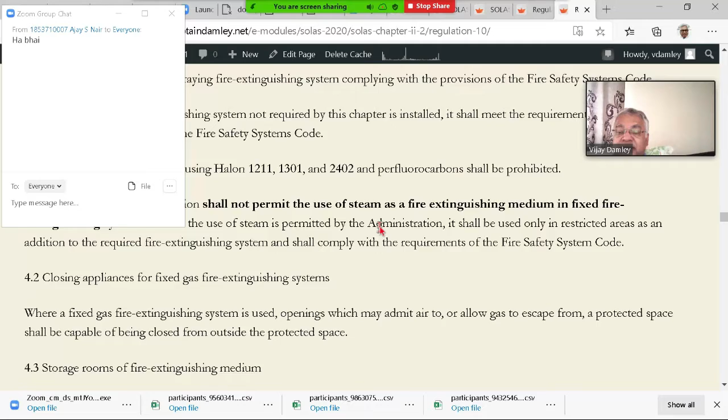Okay, some of the major rules you understand always. Storage room for fire extinguishing medium, as well as the firefighting system, the extinguishing system, cannot be inside the place it protects. It has to be somewhere else. That means, for example, CO2 room cannot be part of machinery space. CO2 room cannot be part of any store or say

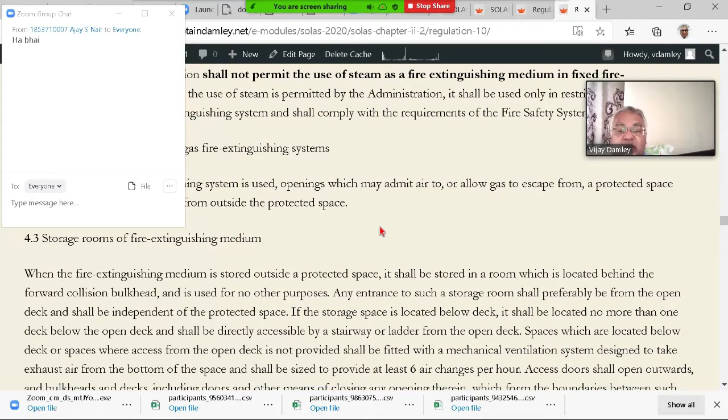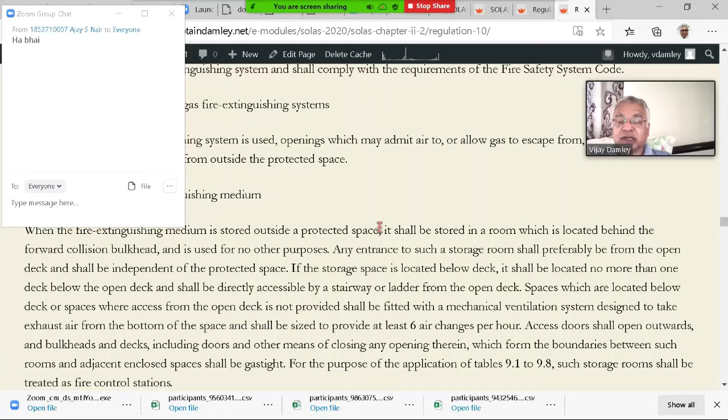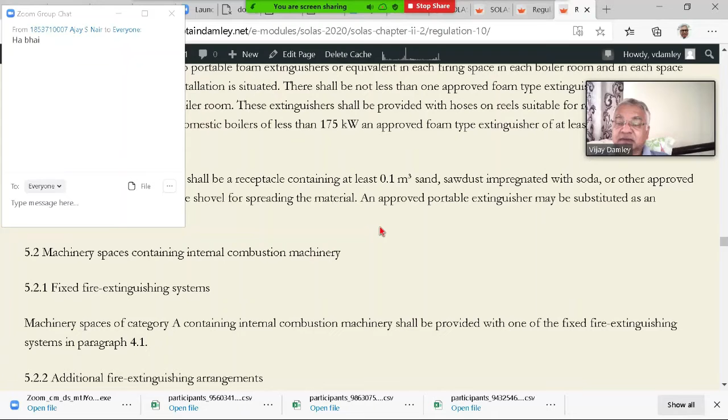holds, cargo areas, cargo holds. So this is one important thing. Always remember, all these things must be outside. All the controls are also outside, not in the same space. That means each space is isolated and the controller is outside. One minute, we were here.

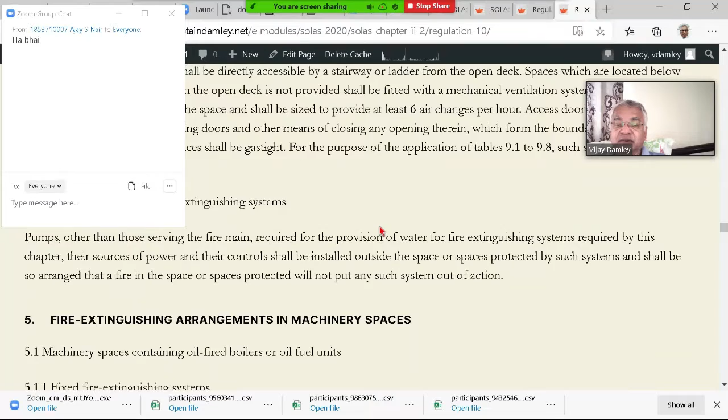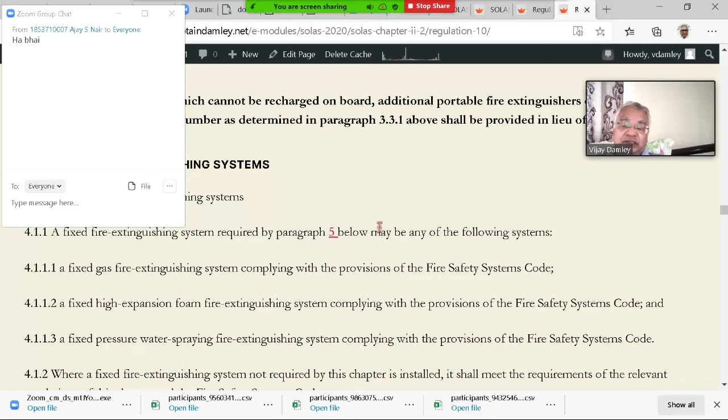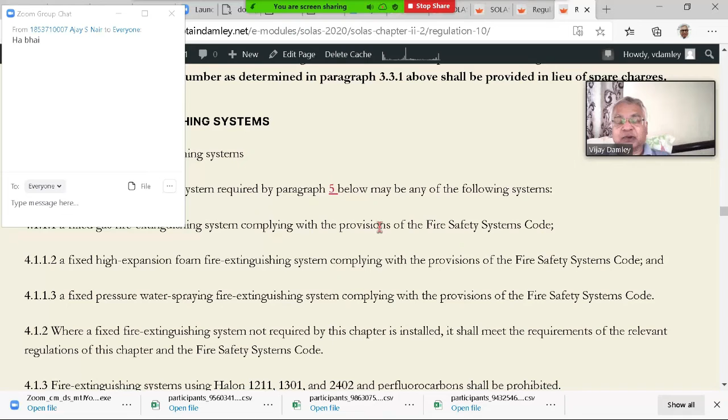Okay, we have got gas type of fire extinguishing system, high expansion foam, fixed water pressure. One means pressure water spraying system, that is water system. And then there are some specialist systems which generally you shall not see. Generally, because then you get into the halons and all, which were allowed once upon a time, and today, if at all any specific thing is required like this, though very very unlikely that you will need a very specific

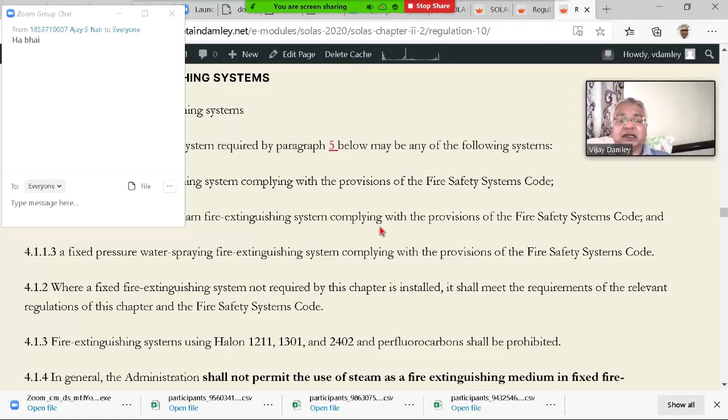gas, because those things will generally go in containers. Nowadays you don't have ships which carry really so much of a general cargo. Okay, steam is not permitted. Okay, and the use stopped long ago. Engine room will have generally foam extinguishers. Then boiler room will have a 45-liter type big one with wheels. Okay.

So in engine room, within 10 meters, every 10 meters you shall find a foam extinguisher in machinery space. I keep on saying engine room, technically it should be machinery space, but you will have it every 10 meters.

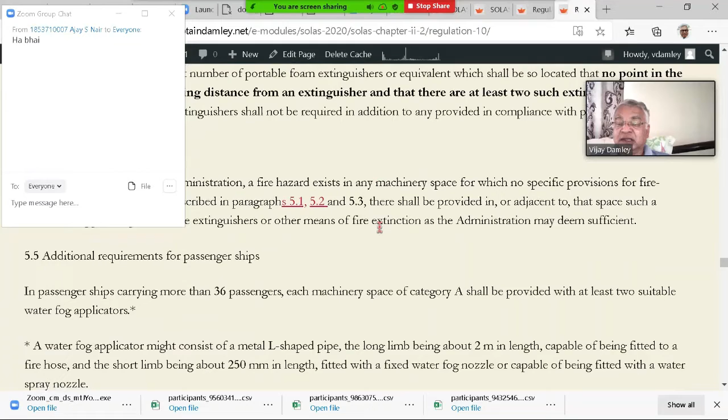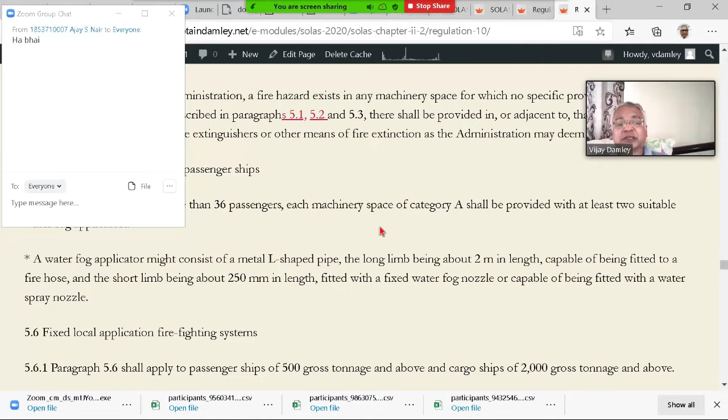Fog applicators, the one you have seen in the lab with the big pipe, those ones, those 2 meter length pipes and all, those ones are more on passenger ships. Then you will have them on ro-ro ships or the special places, that is special spaces means automatically it comes a passenger ship.

Then machinery spaces, today's ships, you will always have two systems. One is a carbon dioxide system and other one will be generally hypermist, and none of them you put it on automatic. The reason is you keep on getting false alarms, and you do not want anybody to get hurt because there was a false alarm and the system got activated. These things happen. I mean, this is not something new. These things do happen.

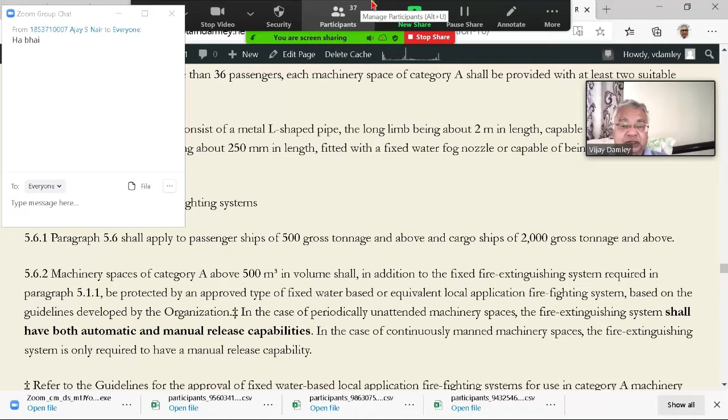One second, somebody is at the door. Let me just have a look. One second.

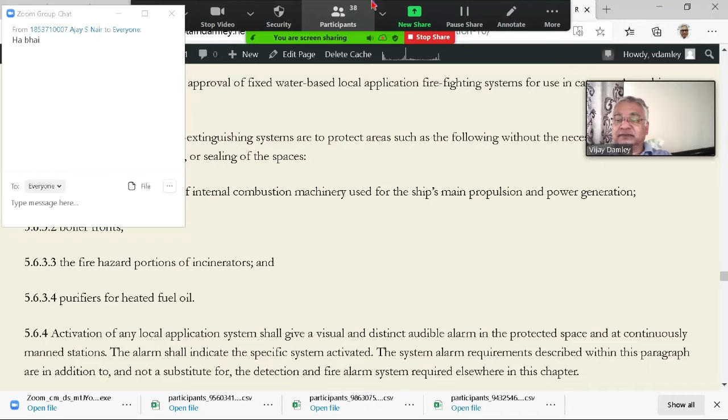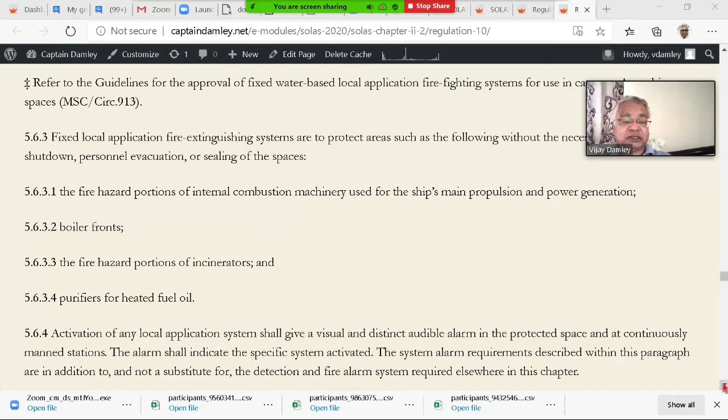Now, like I told you, hypermist systems, and what happens is hypermist system has come in because it is very safe to use it. It is like a fog drifting down, very romantic type. Only thing nobody sings that time, but it is like fog drifting down and absorbing all the heat in engine room. Machinery spaces you will always find hypermist system today.

Passenger ships sprinklers, because they detect fire, they contain it and try to extinguish it, and they also give alarm, because moment detection is there, the first thing that starts actually in the key sequence is if fire is detected because of the heat, because sprinkler systems work on heat, the first thing that will happen is that quartz bulb will break.

That means the sprinkler has started, water spraying has started, and because there is a drop in the line pressure, the alarm starts. So remember this is how the sprinkler alarm starts. First it starts extinguishing and then gives alarm, technically speaking.

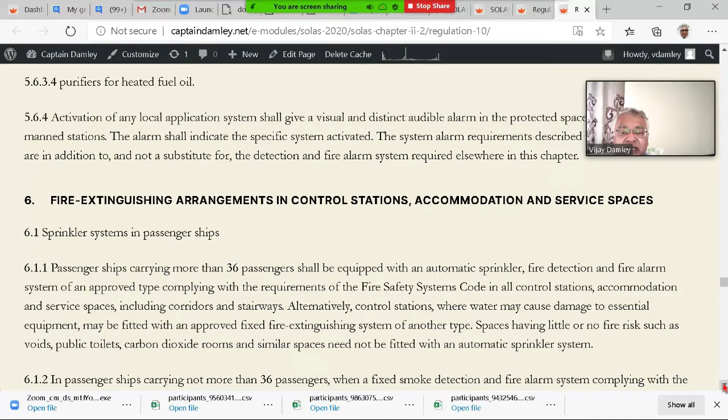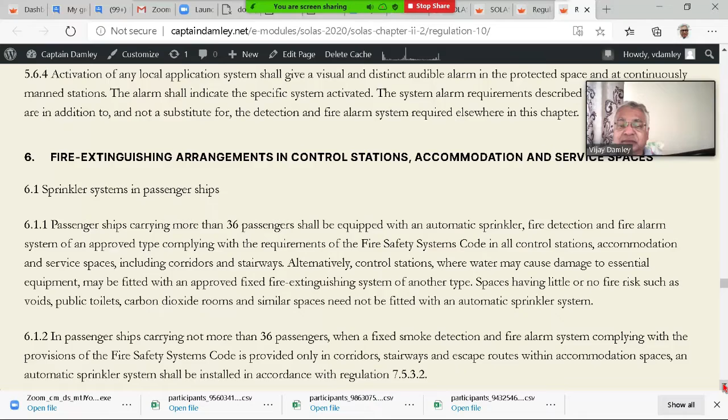So those ones work on heat, and those quartz bulbs, they are not like other detectors where detector picks up, sends the electronic signal, and then the alarm starts. No, here it bursts and the alarm is fixed on pressure system. So moment the line pressure drops, it starts the pump and it also starts the alarm. Got it? I think you must be clear now.

Cargo ships, normally you don't have it, except manual ones. Generally you will find in a paint locker, I will say, and if at all anywhere you have got small compartments where it is possible, but that is generally manual. You start the fire pump, open the valve, and the sprinkler starts, and you make sure that everything is closed.

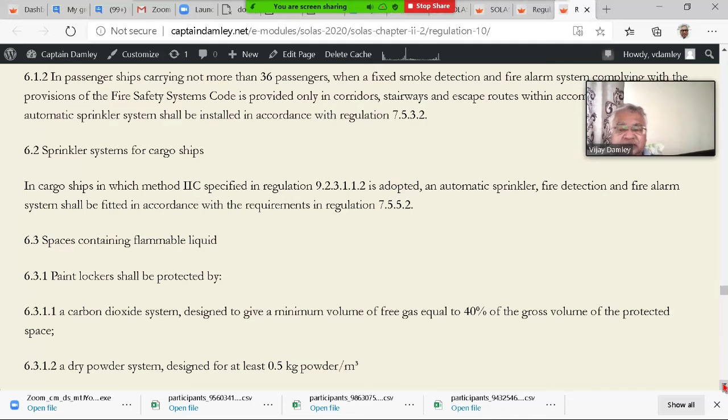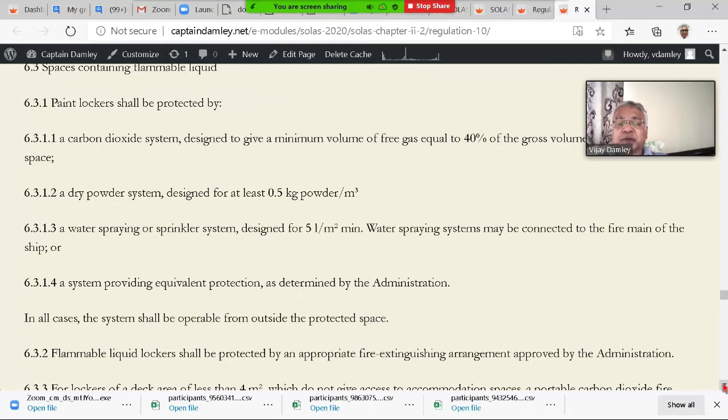Or for the purpose of paint rooms, you also can have carbon dioxide system, that is again manual, but you have a cylinder outside the compartment where you just open the valve and release the CO2 inside. Dry powder systems may be there, though I have not seen one. The sprinkler system 5 liters per square meter per minute, and also then there is something more than that.

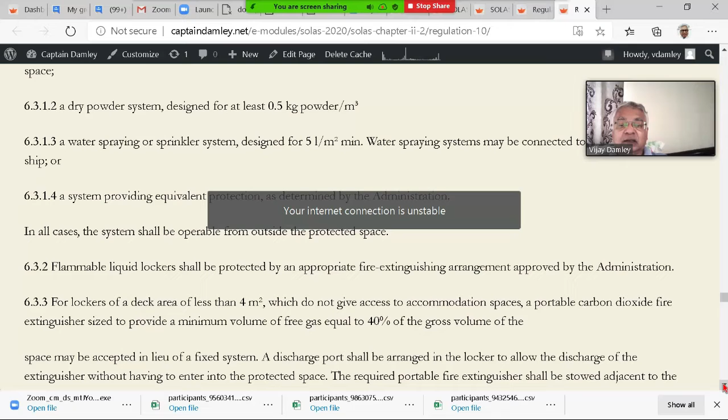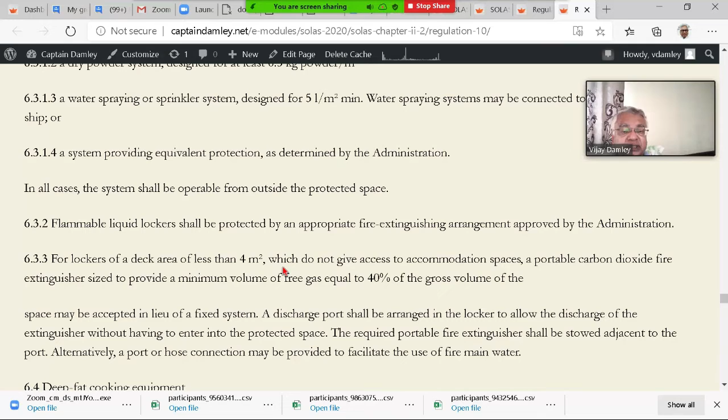Now this is like small lockers, small lock, 4 square meters, means just about 40 square feet. So there you can have another type, instead of any one of the fixed system, you can have a portable carbon dioxide fire extinguisher.

Deep fat cooking, there is a system on top which just fills it up with foam, because hot oil from the kadai, when you're deep frying, can spread quickly and start a fire. So there is a special system for that. In all the galleys you will find a special system, deep fat cooking equipment has got foam from top.

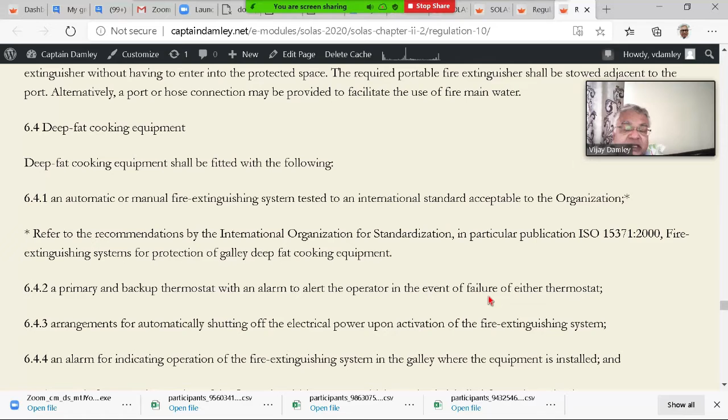There will be, of course, these are minor things actually, but in case you remember it's good, there is always a backup thermostat. Means there are two things, it is not based on one, because if there is a failure, even we say fail safe system and all, but the fail safe principle is we assume it is bad and we take the action. If you are going to have an automatic thing, if your thermostat goes out, it will assume it is fire and it will start working. So you have got a second thermostat also. If one fails, the second one is still telling you no, it's okay. Then it automatically turns off the electric power and so on.

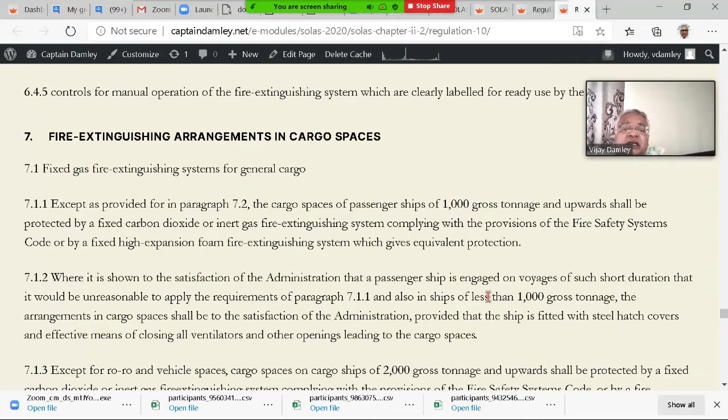Here we start one of the main things, fire extinguishing arrangements in cargo spaces. Now what happens, cargo spaces, you will have normally a CO2 system, a gas system, or inert gas, normally CO2 because that is still going around, and you will also be getting maybe nitrogen based systems or inert gas based systems. They all have got the same property, they don't have oxygen there, they replace the oxygen with the inert gas, so the fire has to die.

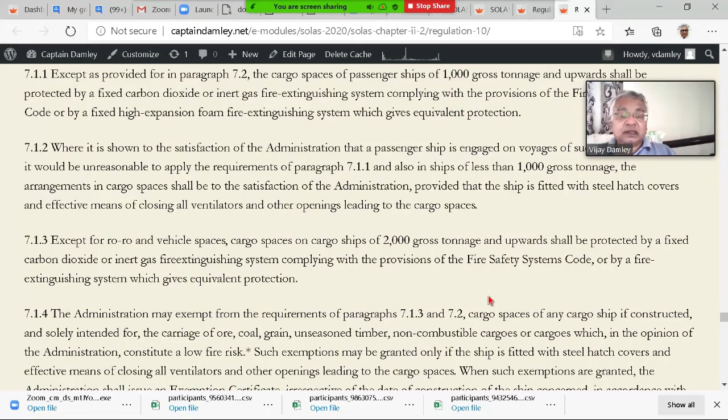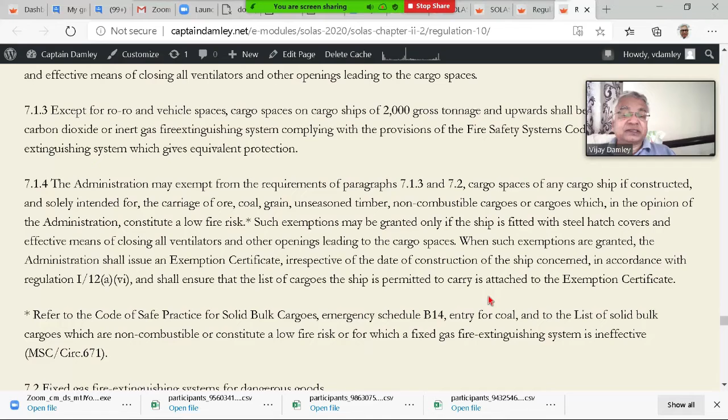Now it is like you take 40% of the capacity, the cubic volume of the largest compartment on the ship which is getting protected by the CO2 system, and you keep that much CO2 there, and when you release it, you release in banks, first dose so much, then the second dose. And if you are going to carry dangerous goods, you may need additional requirements based on what sort of capacity your ship has got, what type of dangerous goods, and what sort of storage arrangements, and so on.

Cargo tank protection is always the medium expansion foam. It is in open areas. Now remember one thing, the gas systems are used in enclosed spaces, foam is used in open spaces, except the high expansion foam. The idea of this medium expansion foam is, in case there is an explosion and the tank gets ruptured, there will be an open area of the inflammable liquid.

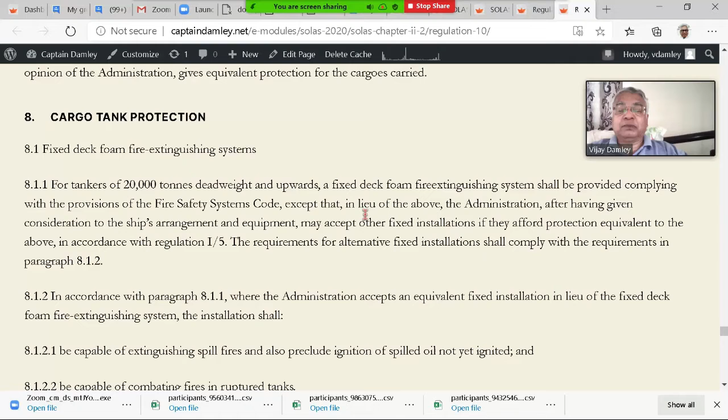Now what will be the area, assuming just the full cargo area, correct? The worst possible scenario is the full cargo area is exposed, so that much area must get covered by the foam, that much foam capacity is given, and that's why you've got applicators. Those fixed applicators are just like some sort of nozzles, and there is a direction you can use, but the idea is to fill up the whole deck with foam.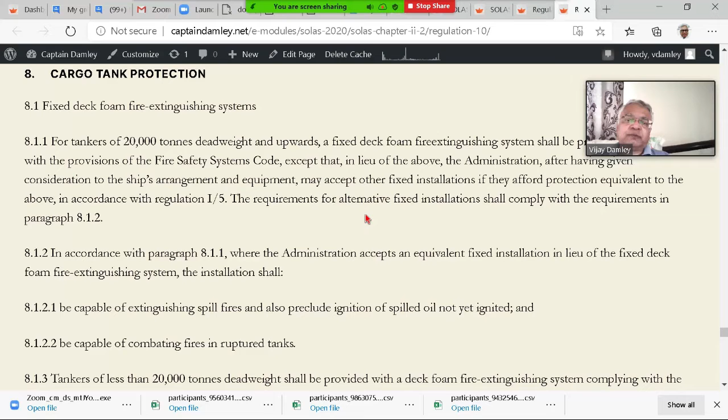And now of course the deck won't be there in case of this. Now putting foam on an empty deck has got no meaning, unless you expect an additional problem is coming, because you are not sure. So in that case you may coat it completely, so that if there is any leak, anything, it will be contained. If there is an explosion, you again fill up, so the foam will cover up all the loose surface on the oil.

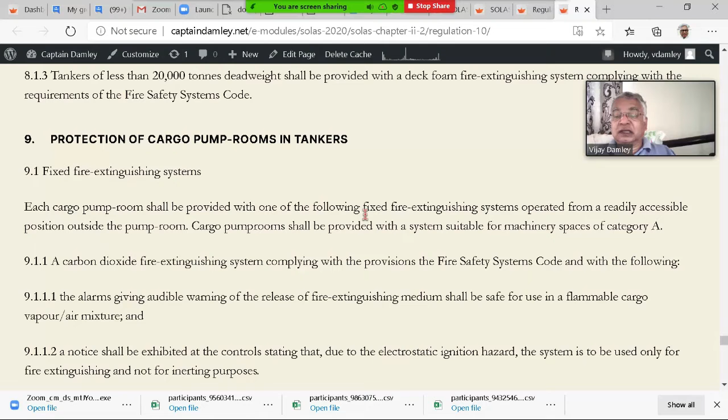Next one is cargo pump rooms. Now here there is a choice: one of the following fixed extinguishing systems operated from a readily accessible position outside the pump room. So again we are coming back to the same thing, that the controller has to be outside in a safe place. A carbon dioxide system with audible warning before you release it.

And this is the very tricky part of it. What happens is, if you have got an inflammable vapor air mixture inside, and if you release CO2, there is a possibility at the nozzle there will be static, and ice accretion, sort of ice crystals will be formed at the nozzle, and they will cause a spark because of static electricity. So it is always dangerous, this is what causes ignition, this is what you should be aware of.

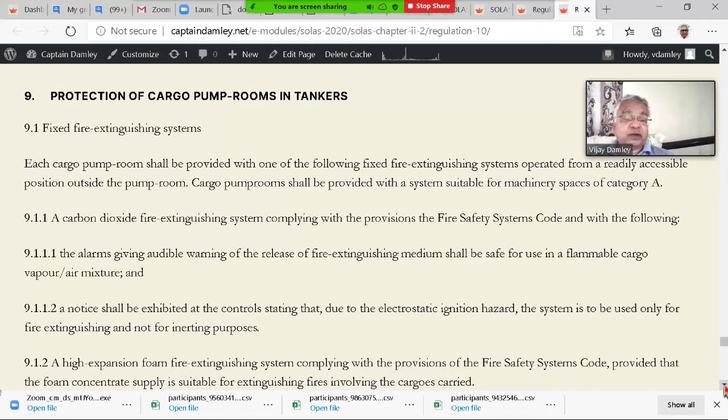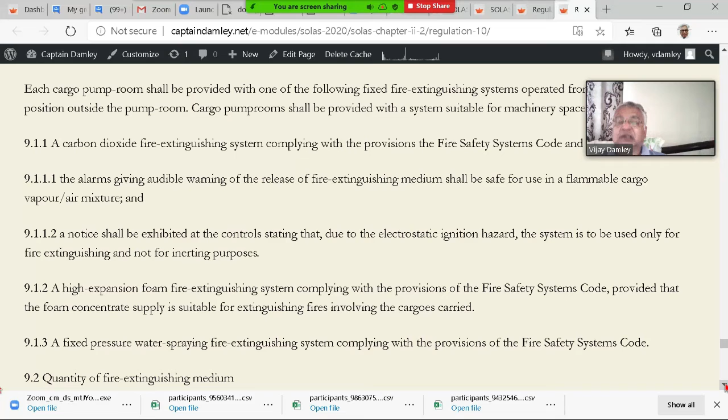You don't use it for inerting purpose, because what is inerting purpose? Suppose if I have got a possibility of fire in a cargo hold carrying some different cargoes, I am not talking liquid cargoes, I am talking some sort of solid cargoes. I can inert the atmosphere as a precaution by just releasing CO2 and saying now it should not catch fire, because it's an inert atmosphere. But that cannot be done on a tanker, that is the cargo pump. So this is a very important line: the system is for fire extinguishing and not for inerting purposes.

High expansion foam systems are possible for cargo pump rooms because these are quite deep - like a smaller building but tall, maybe 7-8 floors. The draft of ULCC class ships today is like 24 meters, plus at least another 15-16 meters to reach deck level - that's 40 meters depth. Cargo pump room should have at least 40 meters, and each floor is approximately 3 to 4 meters, so it's like a 10-story narrow building.

So it is deep, there is enough volume, so it can work if you have got a high expansion foam system.

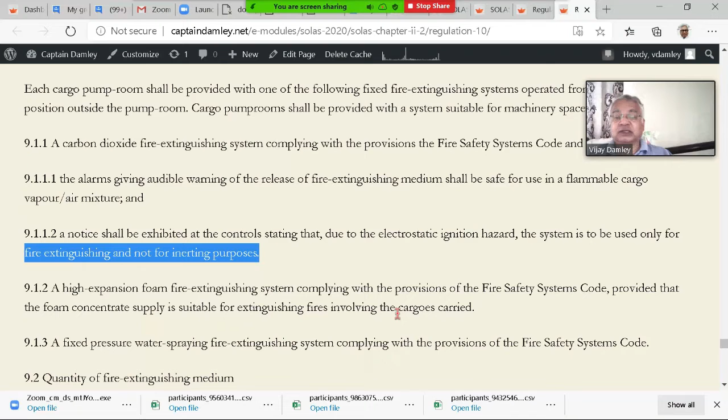Now, provide that foam concentrate supply and all - of course it is expected, if you put the system it has to be there. Or a fixed pressure water spraying system, that is like a hyper mist system. You just allow the whole temperature to be taken off, because one of the problems when we deal with pump room is one bulkhead is cargo tank, other bulkhead is engine room. Engine room normally will be a warm place, so it will always be a sweaty place anyway, one way or the other.

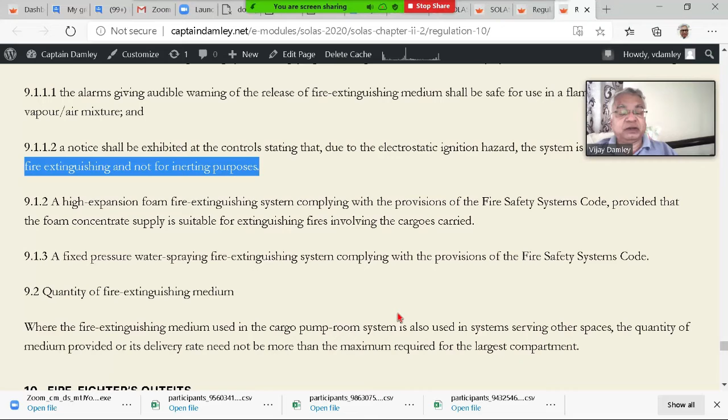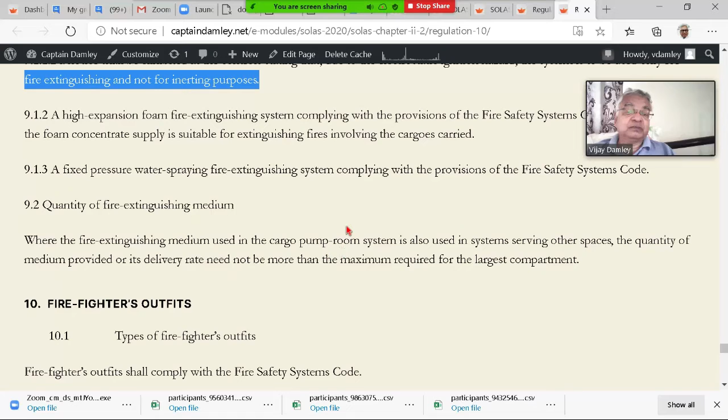And cargo, it depends, because cargoes are also heated - cargoes may be heated to 40 degrees Celsius. So there is enough heat, and the difference in heat is much lesser, so the high pressure system can work much better by removing the heat. And there will be sufficient quantity - the medium need not be more than the largest compartment. Now the largest compartment we are talking about is not the cargo pump room, it will be one of the cargo tanks.

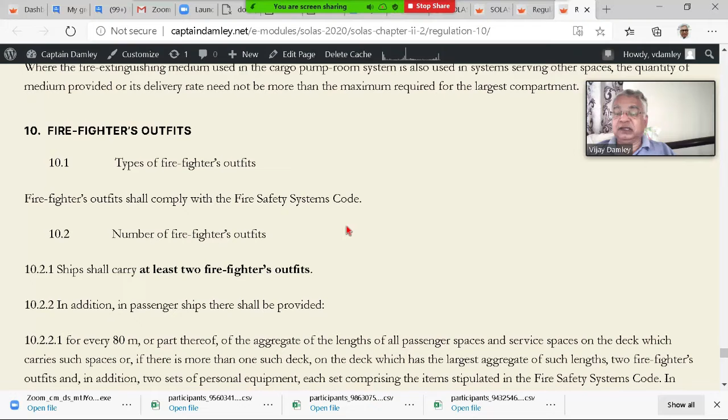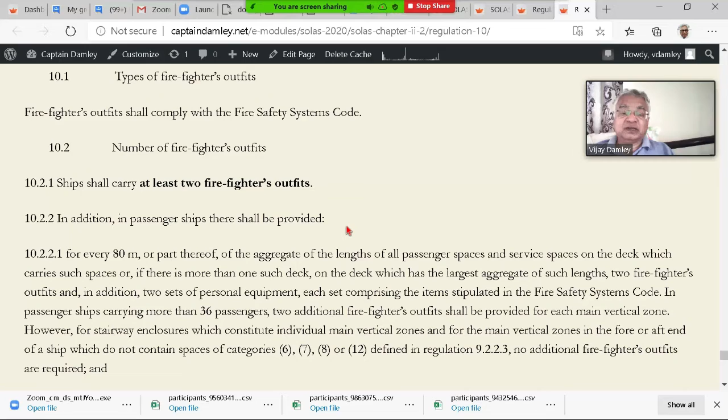Coming to - that was sort of a revision we have finished. Okay, now fireman's outfit. Standard thing: minimum 2 must be kept in a place which is accessible. For every 80 meters on passenger ships you need 2, so it can be more than 2 sets. Now what it contains normally: outfits, personal equipment, and then there is a full list somewhere here.

Breathing apparatus - when you have got the requirement, if you wear one cylinder on the body, you must have 2 spare cylinders, that is 2 spare for each. It is possible, like on passenger ships and all, you have got larger numbers, so they do give concession - if you can interchange the cylinders, then okay, reduce it a bit. But it sounds a little stupid, because you are looking at hundreds of millions of dollars, and then you are going to argue about $200 - it doesn't make sense to me. But anyway, regardless of how rich they are, ship owners can be beggars in front of authorities to gain something.

Now another thing is, if you have got an arrangement to recharge the cylinders - the compressed air breathing apparatus cylinders - if you have got a medical compressor, what is required for charging these bottles, and that is also working on emergency generator, meaning emergency power source, then you can get a concession of reducing the number of cylinders. But most shipping companies will not go for it, because the idea is you can do better drills if you can go freely and use the breathing apparatus.

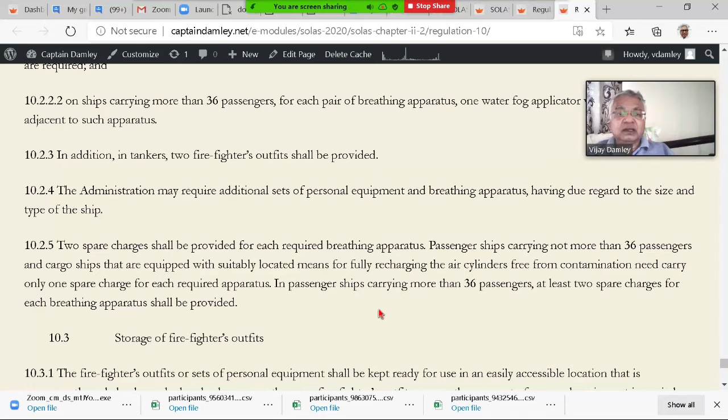If you are going to be scared thinking 'the air will run out, then what will I do', then you don't pay that much attention for these drills. And the most important thing on a ship is emergency drill. Storage must be an easily accessible location, clearly marked with a sticker and all - that all must be there.

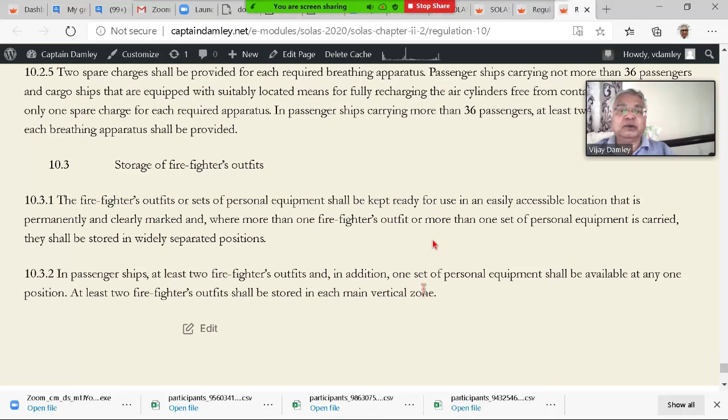Passenger ships, of course, I don't put so much because again this is the reference book and you can't be mugging up everything. So we move to rule regulation 11.

Nobody is on chat. Good. 38.

Structural integrity. Now see, simple rule, no? Maintain structural integrity of the ship, preventing partial or whole collapse of the ship structure due to strength deterioration by heat.

Meaning it should not happen that there is a fire and heat deteriorates the strength of the material, meaning it starts melting and all and it starts collapsing. Then there will not be separation. That means what we thought, that we made a ship with a number of boxes, each separate, and the fire shouldn't go from one compartment to other - that whole thing will fail.

The material used in the ship structure shall ensure that the structural integrity is not degraded due to fire. That is one of the things you will find if you search on YouTube - you will find ships after fire. You know, after fire, what you see? The steel structure with corrosion and all you will see, but it is very much there as it is - it doesn't collapse.

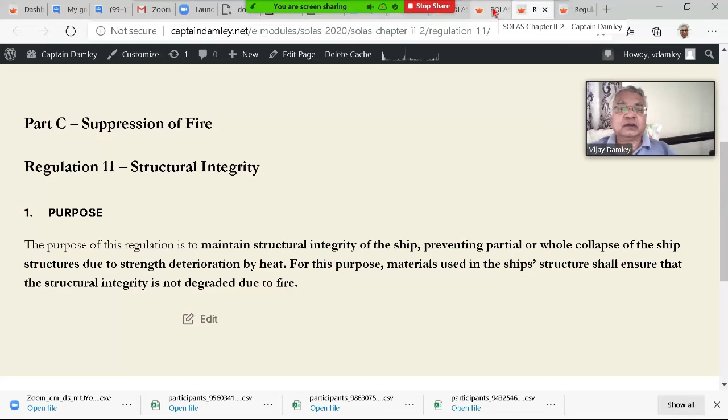Actually, some of you must be getting bored with it if you paid attention earlier.

Escape. We have seen that finally we all try everything, contain the fire, extinguish it, everything well said and done. But in case it goes out of control, you cannot be having a movie style where people have to die. No, we always think that you should escape. If you can't tackle it and it goes beyond your control, no problem, you escape. Now this escape is always to the embarkation deck.

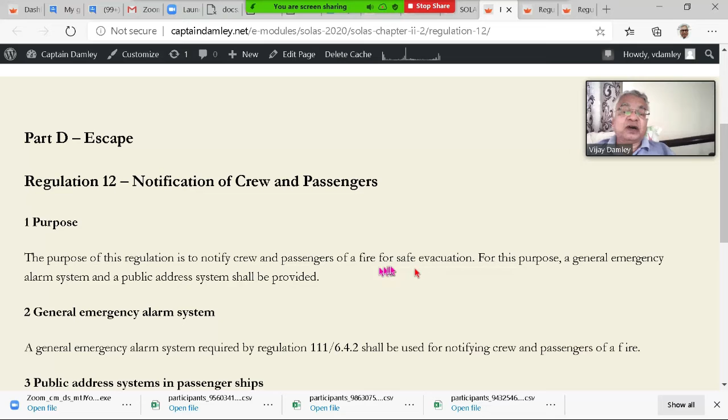To notify crew and passengers of a fire on board for safe evacuation, because on passenger ships all these issues will come up, since you have to start evacuating passengers if there is a fire. So the alarm system only tells you that yes, there is something. The public address system can give you a lot more information, meaning you try to keep calm with passengers and then tell them please go this way, that way, slowly making announcements.

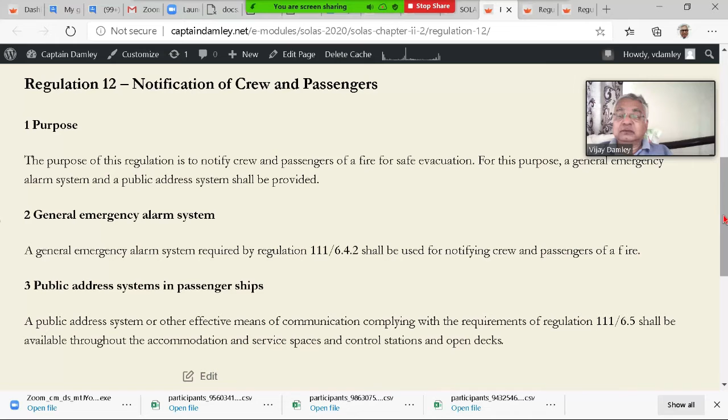The general alarm system is a standard bell, like you train, you keep on doing it.

It shall be available throughout accommodation, service spaces, control stations and open decks, so the public address system is also heard on deck. Even if you are on deck somewhere right forward, you will still hear it. That is the public address system. It cannot be the case that it's heard in accommodation but not heard outside. No way.

Now we are on regulation 13. Doing quite nicely.

Escape. So we are saying we can warn people that there is fire, like passengers basically. And when we mention the crew word there, understand one thing: even on passenger ships, you have people who come under crew. They have done the elementary firefighting courses and all, but they have their limitations, because the guy who works in a canteen, what do you expect? He may be very much willing, agreed, enthusiasm can be there, but he can't do anything about it.

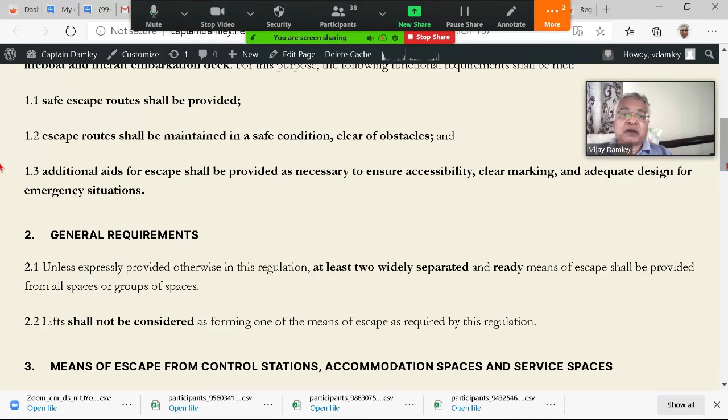One minute, I have got some query. Very good, everybody remembers, eh? Good, you all are good guys.

Because escape route is one of the things questions can always come from. Not only that, even in interviews, this is something they can always ask about escape routes. Remember, at the lower level you have got lighting and other things, because in case the smoke fills up, which it should not normally, but in case it does, you can see from the bottom, because smoke will be above.

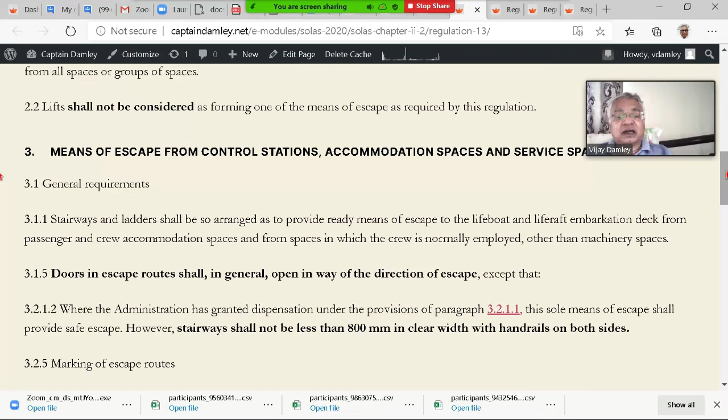Okay, we are coming back to favorite ones. It leads to embarkation decks, and it is there anywhere. The idea is wherever you are on a ship, wherever you normally work, from there it guides you to the embarkation deck. Escape route doors will open in the direction of escape, that is the idea, but exceptions can be made.

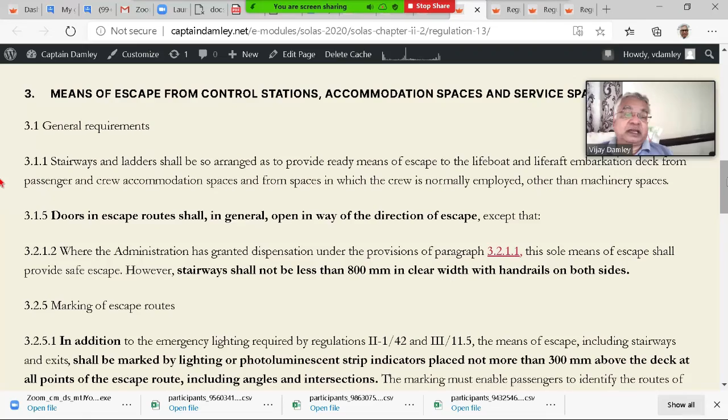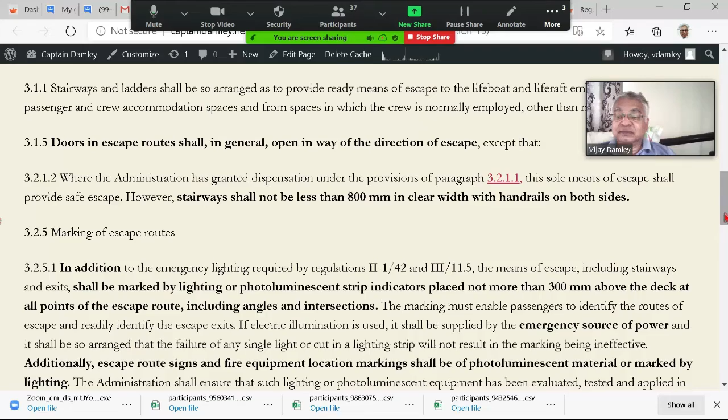Stairways will not be less than 800 millimeters wide with handrails on both sides. Markings are there by lighting or photoluminescent strips placed not more than 300 millimeters above the deck, meaning from the bottom. Okay, not too high, down. And all the illumination is on the emergency source of power. Additionally, this photoluminescent material is also approved, or marked by lighting.

Now this lighting, the best example is if you go to decent hotels, you will notice they have got it at the bottom, and a lot of households are keeping it nowadays. Next to the staircase you have got lighting at the bottom, because at night time, especially if you have an elderly person, he starts looking around, because at that time you can't see clearly.

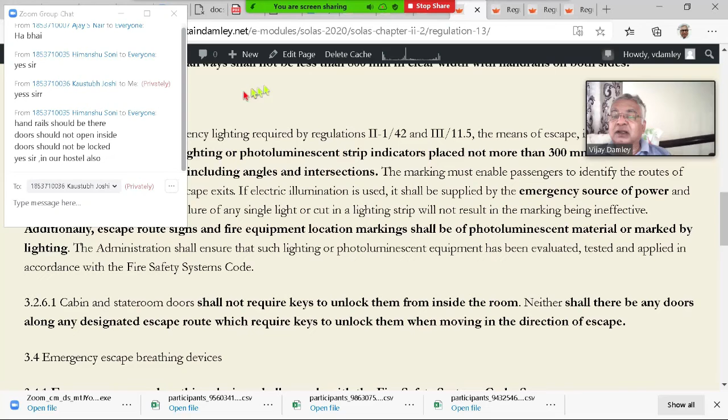So yes, very good. He remembers hostel now.

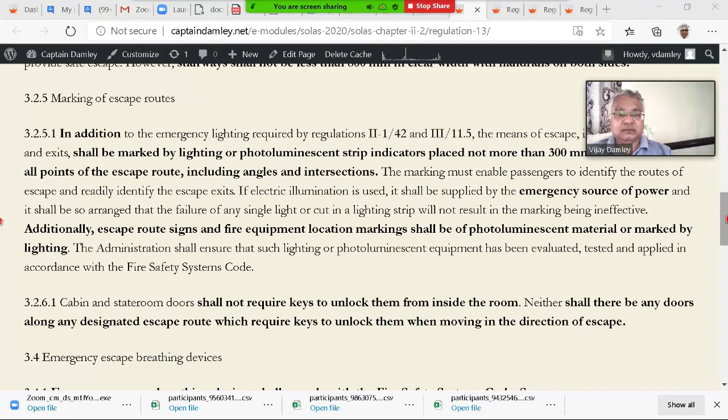You just go tuck tuck and you are running. That's it. It is like the typical movies you see, how you escape, baal bach gaya. It's like that. Like, saved by a hair's breadth.

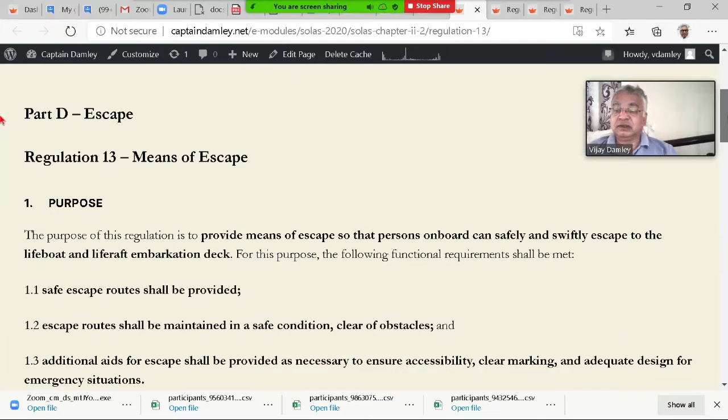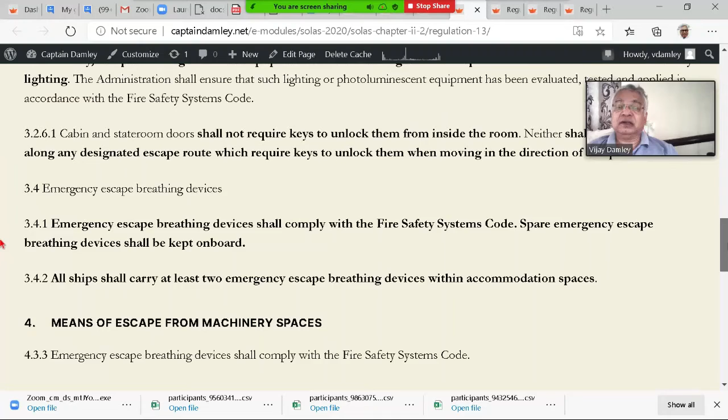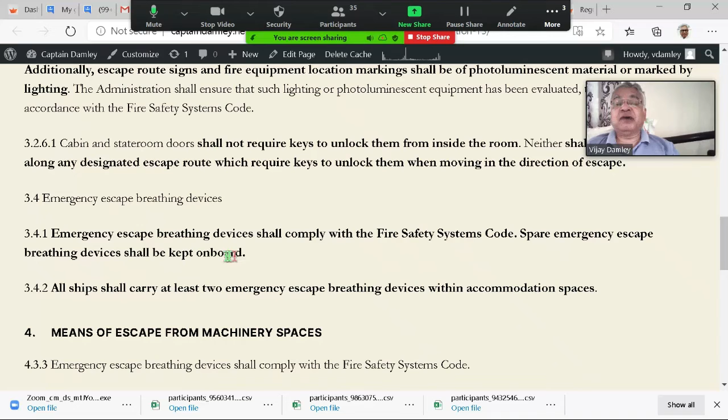Then, in the beginning we saw some of the things which were mentioned. Additional aids for escape shall be provided, 1.3. So now we come to additional aids here. EEBD, emergency escape breathing device. Everything will always comply with the FSS code. Spare emergency escape breathing devices shall be kept on board. All ships carry at least 2 within accommodation spaces.

Now we don't normally expect people fighting over it, that I will use it and you won't.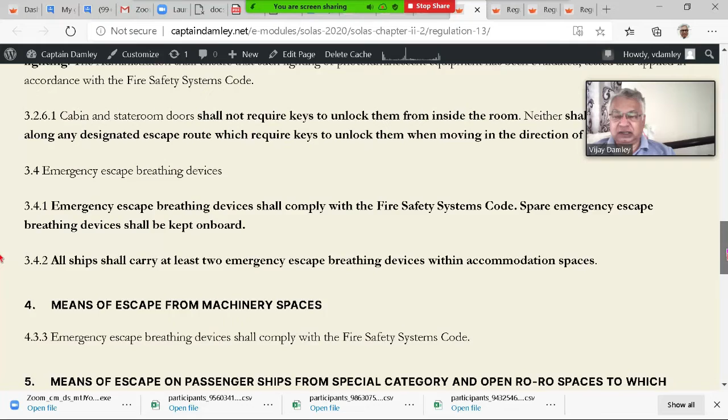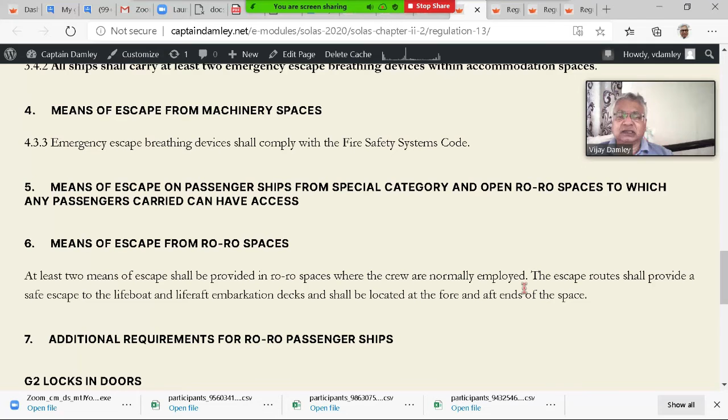Now this FSS code, we'll go through it when we start. Ro-ro spaces having two means is general. In general, there are two escape routes. Now this is something that is redefined again because of ro-ro spaces. The ferries have become very important. Why? Because that is where you have passengers involved. That is where the problem comes.

And also remember one more thing: the escape route keeps on expanding in width, especially on passenger ships, including after every ladder there is a holding area, a bigger platform, because people can get tired while climbing up. They want to catch their breath, so there will be more people there, and then they can start again.

Now B class doors, the basic principle is the cabin side, other than by means of key or key card. If instead of keys there are key cards, there will be an arrangement by which the moment the fire alarm comes, the locks will open up automatically. Flexible ladders shall never be part of an escape route, which we did say earlier.

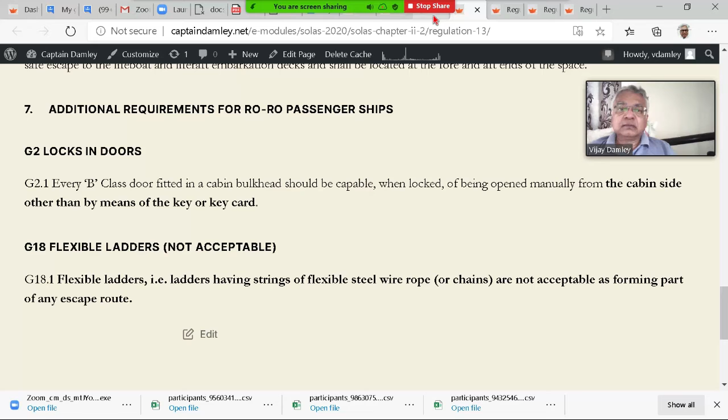Okay, we were on 13, no? 13, 14.

Operational readiness and maintenance. Now this is something which should be done on every ship, but I have also seen, during my sailing days, so long before you were born, on national flagships, generally things are very slack because of a variety of issues, labor union issues, this, that. But that is where operational readiness and maintenance used to be one of the concerns, not on foreign ships. We were always very careful on foreign ships, no excuse, you will be thrown out of the job if you don't do your job.

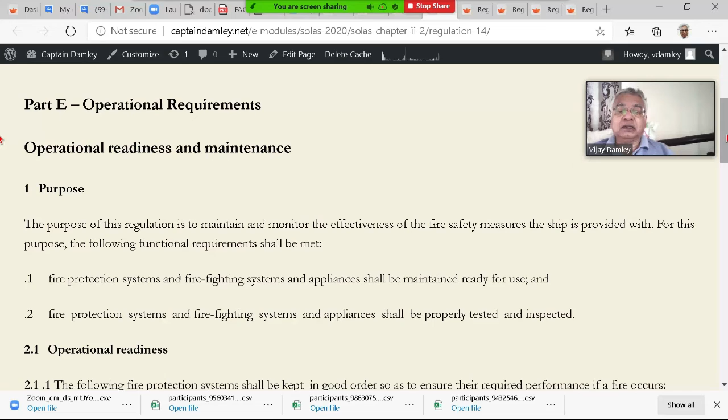Purpose of this regulation is to maintain and monitor the effectiveness of safety measures the ship is given, whatever is there on board. Functional requirements shall be met, means what? Fire protection systems, firefighting systems and appliances shall be maintained ready for use. Again and again I have mentioned it, this means 24/7. In case you are taking out anything for repairs or maintenance, maybe just maintenance checking, you have to have an alternate arrangement ready. Otherwise it has to be always ready for use.

You cannot say, I did this much work today, the rest will be done tomorrow. No. When we take any job in hand, we complete it. If I had planned completion by 5 o'clock and it did not finish, that doesn't mean I'm going to postpone it and do it tomorrow. No. We work overtime and we finish it. Once it is finished, working hours and rest period can be adjusted. That is not a problem. But you cannot leave it for tomorrow.

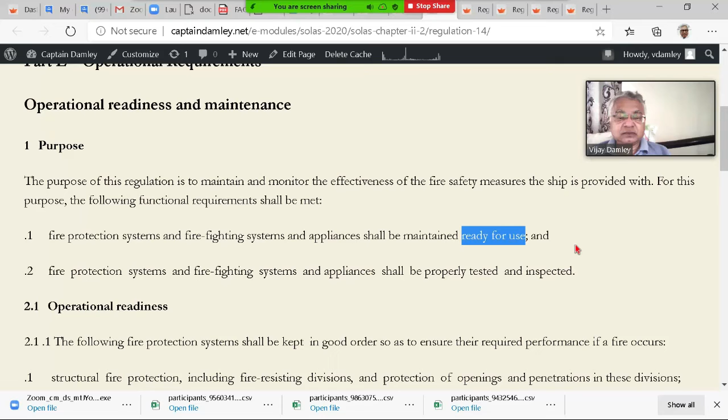Then the same things shall be properly tested and inspected. So this is testing and inspection. Maintenance is something that comes out after testing and inspection: this is not okay, or there is planned maintenance, lubricate this, lubricate that, check the connection, coat it with this, whatever it is. Fire protection systems means protection of openings, penetrations, everything; in simple words, doors, everything is part and parcel. It is not only your mobile equipment or fixed equipment. This covers all the doors.

Fire resisting divisions means the bulkheads, those class A bulkheads. Any opening in it or any penetration, because a pipeline is going through, those things also must be properly maintained. The door must be properly maintained. You cannot have the insulation of the door gone. It has to be maintained the way it is supposed to be. Fire detection, fire alarm systems: the general fire alarm system is linked with the emergency alarms, and detectors are there, depending on what detectors you have got.

Means of escape systems and appliances. So escape systems also must be tested, inspected and maintained, right? So how do you test an escape route? You actually make somebody run and check the escape. Inspection: every door, you will see, is it opening properly, not jammed, the openings are okay, the lights are working, not fused, the labels are okay, not dirty because somebody put a handprint on it. This is what you check on escape routes.

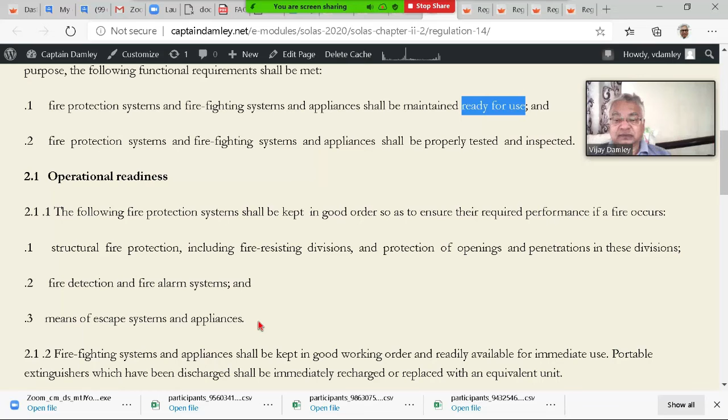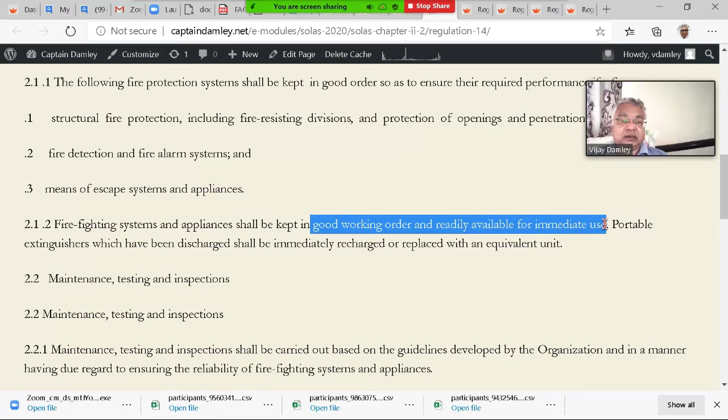And again we are coming to the same point, good working order and readily available for immediate use. This immediate use part used to get mixed up. Some of the older faculties still say to start the fire pump we must follow the instructions. No, it is our job to make sure it is always in good working condition. Firefighting systems and appliances shall be kept in good working order and readily available for immediate use. So you cannot have huge one or two meter long instructions on how to start the emergency fire pump, open valve A, close valve B. Everything has to be totally ready. One press of a button and it is in action.

Portable extinguishers which have been discharged shall be immediately recharged or replaced with equivalent units. You realize this part? It happens after every drill. We try to utilize some extinguishers at least once or twice a month. You will find some extinguishers discharged, and that is where cadets generally come in. They have to assist the second mate, third mate, whoever is there, to refill it immediately and put it back. Unless you have got a spare equivalent one, put it there and then do it. But the number must be maintained all the time.

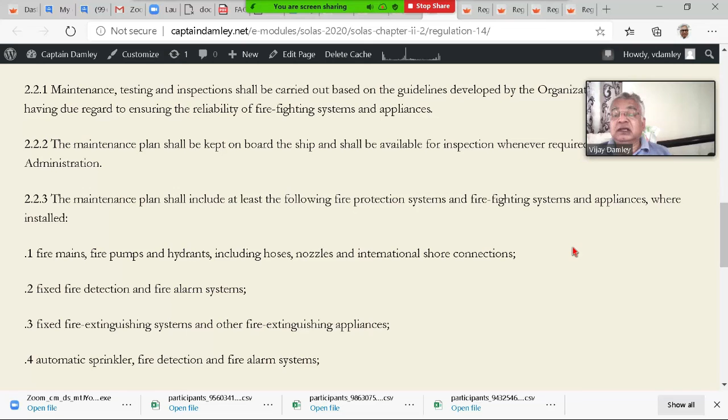Now the maintenance plan will include all this: fire pumps, hoses, nozzles, shore connection, fire detectors, fire alarms, fire extinguishers, automatic sprinklers, ventilation systems. Ventilation systems also come in, including dampers and their controls, because generally these dampers, if they are not used, get frozen, because the ship is made of steel and you have a lot of salt in the air. Salt finds a way, condensation will be there sometime or other, so rust can form and it can get jammed up.

So a good routine is normally to open and close all these dampers. Only thing, if they are on a powered ventilation system with the blower on, you have to consult the ETO or the engineers to switch it off for that brief period of half a minute, 1 minute when you check it out. But this is where normally the problems come.

There are ventilators, and a lot of ventilator flaps have rubber gaskets or different types of gaskets, and those are like small windows, and then you find they are frozen, because you always need an arrangement where it is either open or shut. So both places you have a securing arrangement. Now I kept it open for the last 3 months and nobody bothered checking. Then you go in the 4th month and you find it is frozen. So you are in trouble. Then you have to get rid of that corrosion, you need hot work, then you free it so it starts moving easily. So ventilators, always remember, are the trickier part.

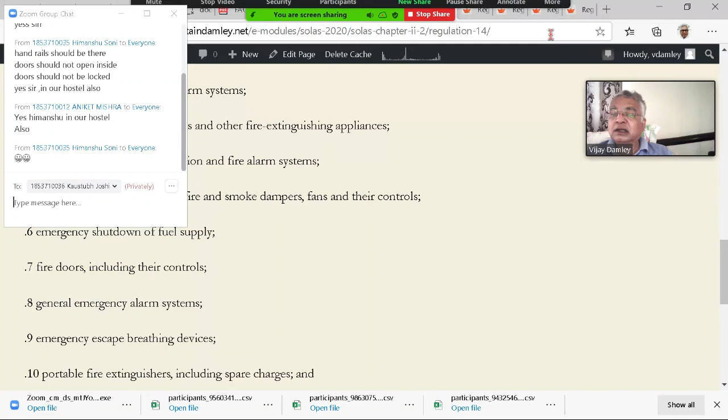Okay Apurva, what happened? Time up or what? No, there is time. Apurva, ask on chat. Hey? Okay, fine, no problem.

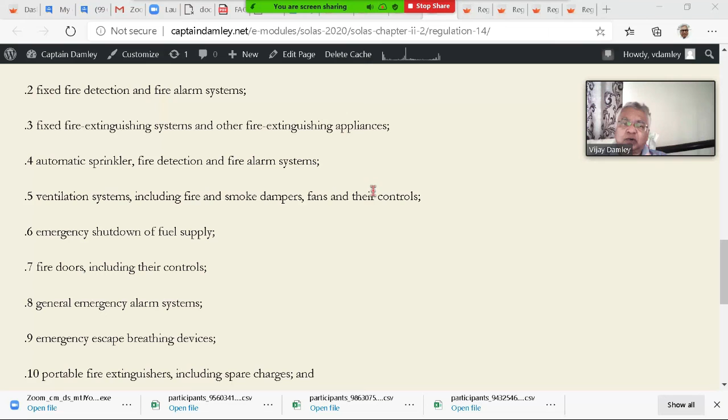Okay. Fire doors, because a lot of doors we keep open for convenience. There are electromagnets which hold the door in the open position, but the moment there is a fire alarm, they close, and there is a self-closing arrangement. The electromagnet stops holding it and allows the spring action to close the door. So fire doors including their controls means you have to test the control by pressing it, and see whether the doors are closing or not.

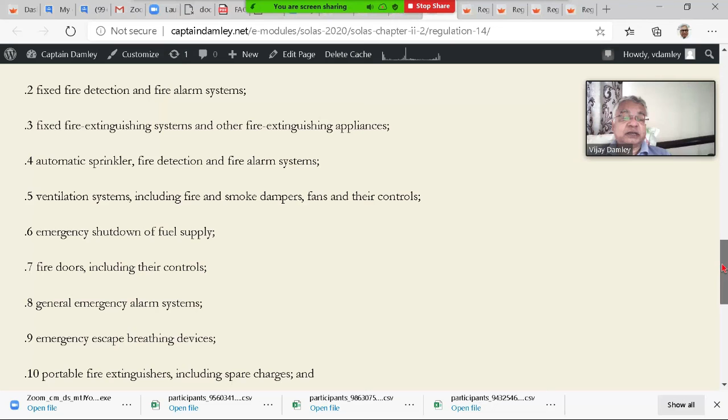Portable extinguishers, again including spare charges. Remember one thing, when you are testing all these things, you are also checking your spare parts inventories. If it is not mentioned, remember the spare parts inventories and spare parts must also be checked along with all this. Fireman's outfits, open it fully and see everything is working and so on.

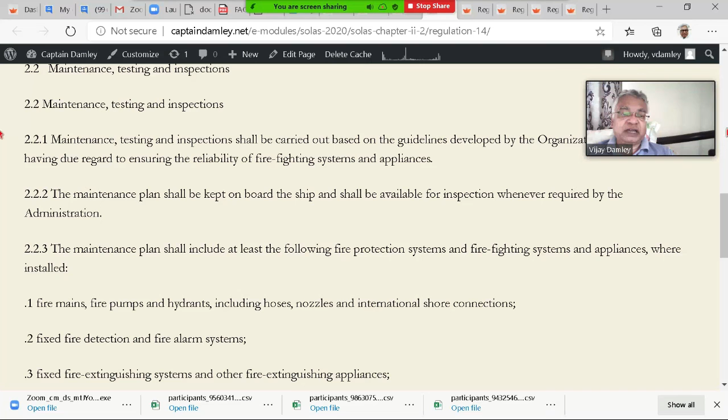The maintenance program may be computer based, that is what you are going to get anyway in today's world. When I was there we had computer based, because I worked on that to get all our ships on a planned maintenance system. First we started with life saving appliances, we computerized that, and then we decided to go for full PMS for all sorts of equipment. I worked about 2 months in Hong Kong and got it done, to program some software. So today we stop at 14.